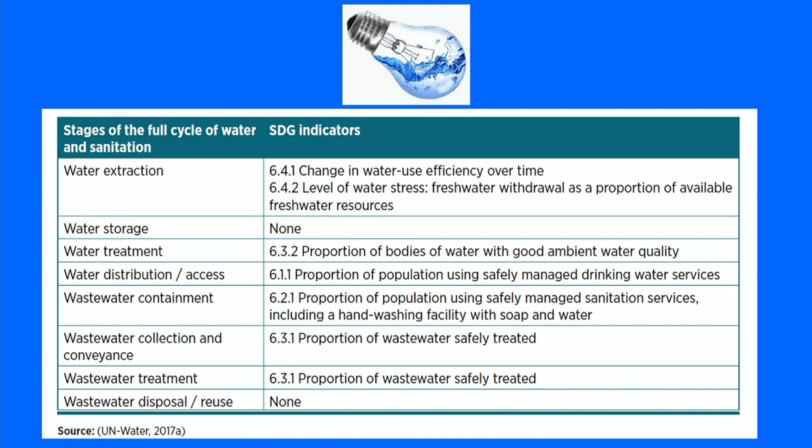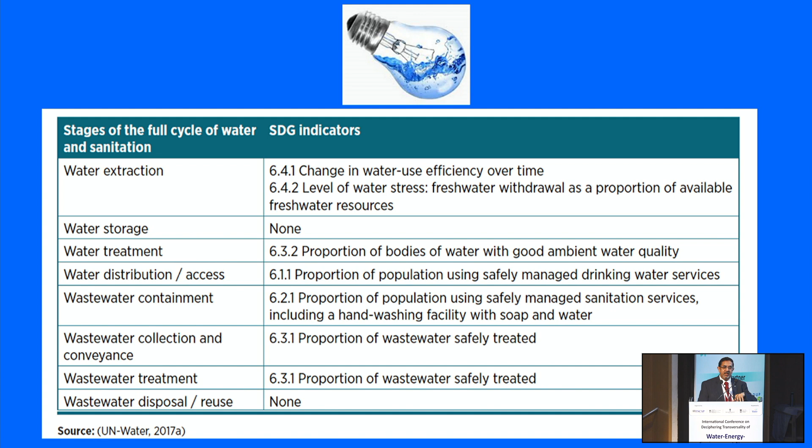If I walk you through, this is from the UN's SDG 6 standard. I don't want to go into much detail, you can get it, but what I'd like to focus on is the top of the slide up there. I like that particular structure. There's a bulb, that's electricity, and there's water in there going together. So if you really look at it, from water extraction all the way to wastewater disposal, there is enough energy involved that is either created or completely used based on where you are in the system process. If any particular city is looking at how to move in the direction of net zero or carbon neutrality or anything else in that fashion, you can move from left to right.

Water supply, supply hydraulics, sewerage, drainage, point and diffuse pollution, diverse fit-for-purpose sources, and then lastly, adaptive multiple functionalities. And you can literally get, wherever you're moving, an advantage of moving from water neutrality to energy neutrality and so forth.

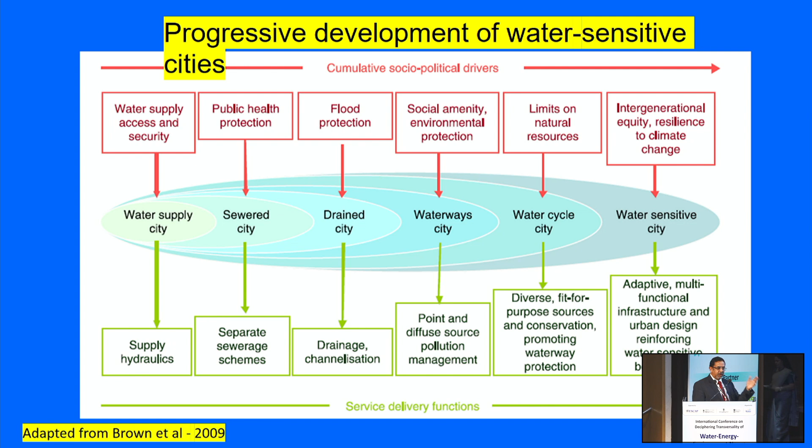Over time, it appears to people that, no, I need the water and I need the energy also. How does it matter if I have an expense of energy to get water, because water is a premise that without it I can't live, but without electricity I can live a little bit longer. But if we combine both of them together, then the advantages are much better, because once you get the water, then that water goes as wastewater.

We have not been looking very seriously at how to develop the water nature so that wastewater actually becomes a resource for us. And that resource can drive you back and forth in a circular way to get the advantage. This is 2017 IEA data, which shows the total terawatt hours, and on the right side are the percentages, the share of global electricity.

In the earlier session, a lot of people have talked about the water-energy combination, including hydro energy and usage of energy. And I think Dr. Narula has also talked about various levels of availability of energy and use, or consumption, of energy. So if you look at it, transfer, that is pumping, whether it's groundwater or coming from a long distance.

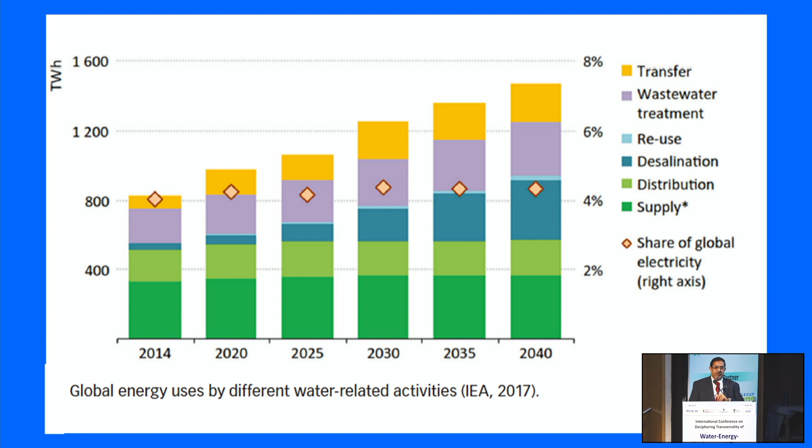In India particularly, over the last several years, we've been looking at whether I can get the water from 20 kilometers, 100 kilometers, 200 kilometers, rather than focusing on whether I can use the wastewater generated in the city to develop various water qualities for fit-for-use purposes and so forth.

So if you look at water as one concept, maybe it's rainwater, groundwater, surface water, or wastewater. There are many areas you can look at, but if you consider it as a one water concept, then that concept can take you deeper into energy conservation and possibilities of using energy in various aspects.

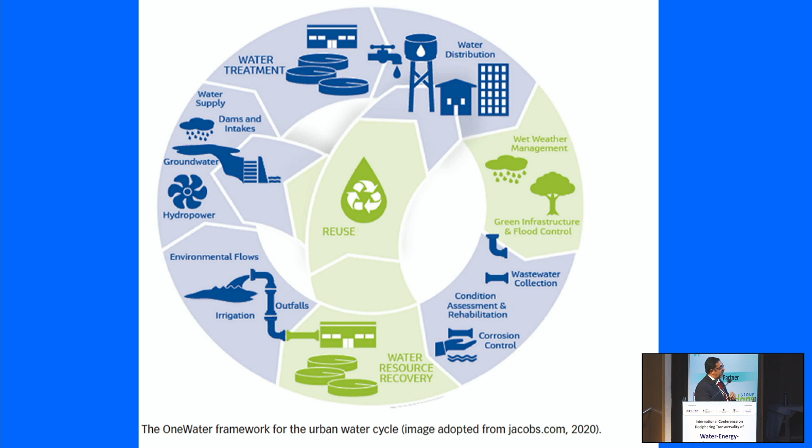So reuse then becomes a primary driver in analyzing how to get maximum benefit of the system. You can start from the left side: water supply, dams, intake, hydropower, environmental flows, that is E-flows, irrigation, outfall, resource recovery, and so forth. And essentially each single item is also heavy energy consumption. If that can be optimized and mitigated, then you can get much better benefits.

Coming from a background in wastewater and processes, if you look at GHG emissions and other emissions coming from the wastewater side, water really doesn't give you GHG emissions, but it uses electricity generated either from fossil fuels or from natural sources like solar, but the percentage of that use is much lesser.

But on the wastewater side, it consumes a higher amount of energy as we move from just discharge of BOD, that is biochemical oxygen demand, and suspended solids, to the removal of nitrogen and phosphorus. As you move to lower and lower values of nitrogen and phosphorus in the discharge standards, you get more and more energy requirement.

For example, when you do a normal BOD discharge of say 30 milligrams per liter from a 210 or 180 milligram per liter influent, your consumption is hardly 1.2, 1.3 kg of oxygen per kg of BOD removed. For nitrogen, to convert to nitrate and denitrify, you need almost 4.5 kg of oxygen per kg of nitrogen oxidized.

If you consider that transformation, then obviously you can see the amount of energy being used in the process. On the screen, going from left to right, you have raw sewage, so there is pumping, which uses energy right there.

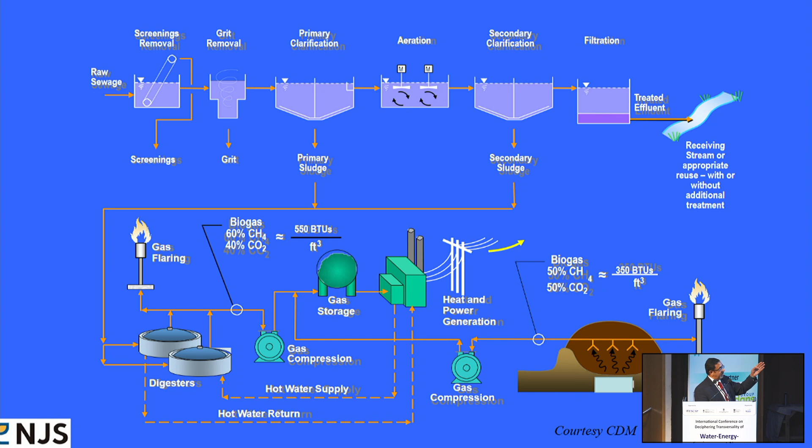We were doing fairly well up to that point. Once we start looking at what else we can do with that, the last column of the water is basically recycle, reuse, or fit-for-purpose recycle and reuse. Then you can use it for a variety of applications, from agriculture to indirect potable reuse to potable reuse. And the sludge or biosolids that come out can give you a lot of input into your nutrient recovery, your nitrogen recovery, and your CNG.

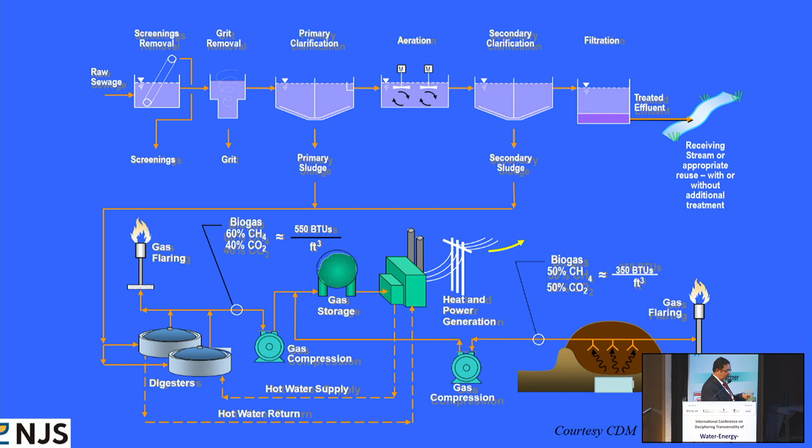In the old times, we were doing flaring, burning it out, so that CNG can also increase there. But methane has a high warming rate compared to CO2, and nitrous oxide has an even higher rate, almost 200 times more than CO2 in the atmosphere, so to control GHG emissions it's better to utilize them in the process for recycle and reuse.

Overall, if we mandate these 9 steps in the process: energy efficiency, carbon footprint, cost efficiency, plant capacity, resource efficiency, hazardous substances, for example pharmaceuticals and polyhydrocarbons. And the last one is a little bit tricky, that's PFAS. We don't have a regulation yet in India on PFAS, but there is regulation now in the West, especially in the UK and US. If that comes to us, our water will require more energy to remove PFAS from drinking water, and the standards set will also affect energy consumption. Health, water reuse, and regulatory compliance are the main key 9 points you need to drive in the process.

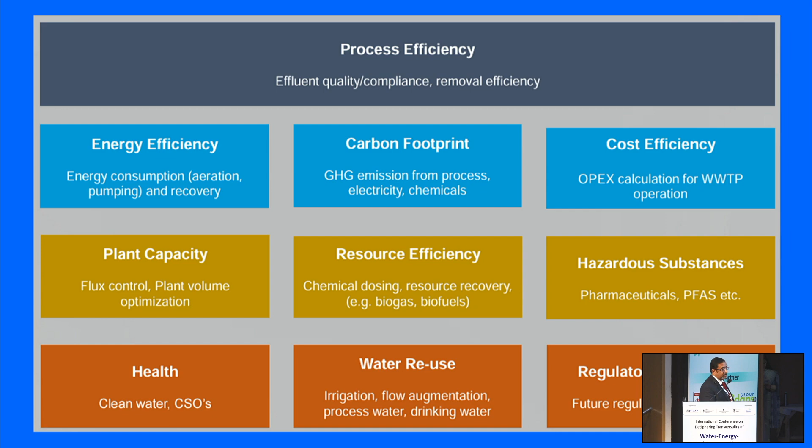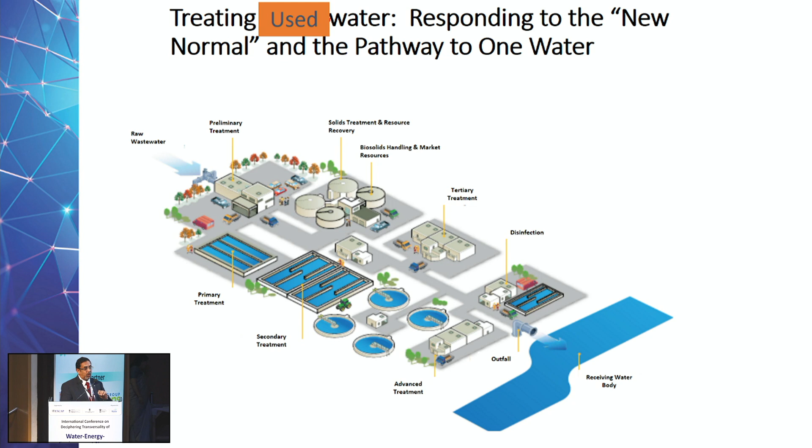To me, if we start looking at the one water concept in the mindset, then we can start considering water as a factory, wastewater as a water generation factory, not necessarily something to discharge into rivers or processes. So instead of saying treated wastewater, I would like to say treated used water, because public awareness and mindset is most important.

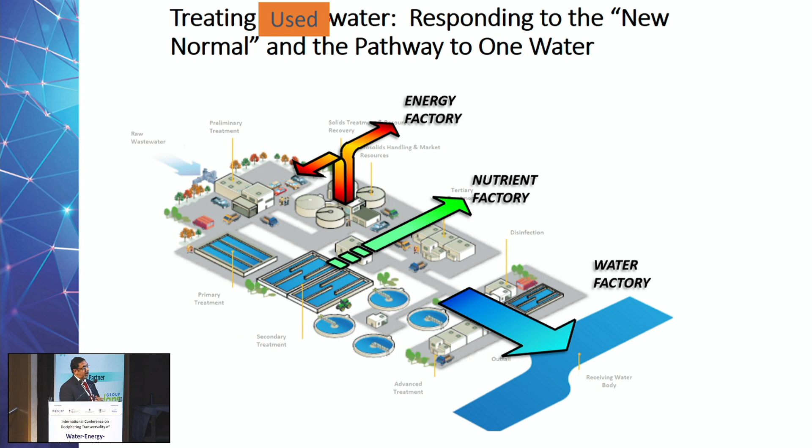I'll give you a classical example. When direct potable reuse was initially started in the West, it was an election year, and somebody said, I don't want toilet to tap. The whole project just went straight down the drain. That said, if you are really desperate about water, you can go to Namibia, to the Windhoek wastewater plant, which has been operating for the last 50 years. It literally takes wastewater from households, treats it to drinking level, and sends it back to the houses. So you need to look at that scenario wherever you can.

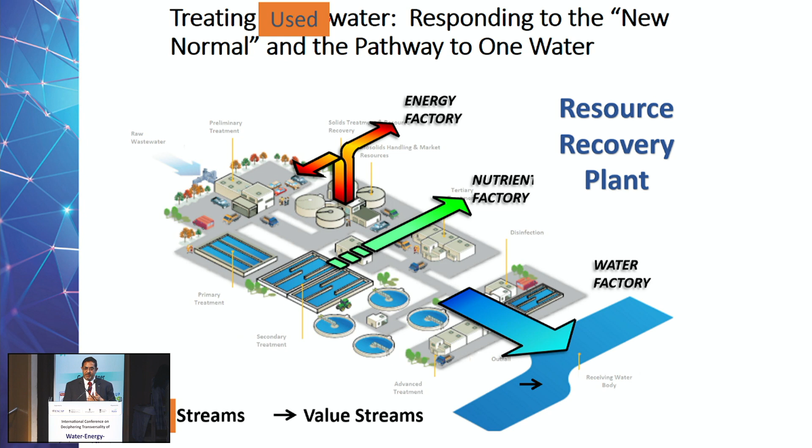So I should see used streams giving me a value stream, generating revenue, a nutrient factory, and energy. Another example: we've been working with NMCG, the National Mission for Clean Ganga, as well as NRCD, the Japanese Bank and the World Bank, to showcase how wastewater biosolids can be used for a variety of applications. A lot of areas in India, particularly in agriculture, are deprived of carbon. That carbon, if treated properly with zero or very little bacterial contamination, can be utilized very effectively as a soil stabilizer.

Here are a few examples of what we have done recently. If you see on the left side, if you optimize the treatment process, you can use a lesser amount of energy.

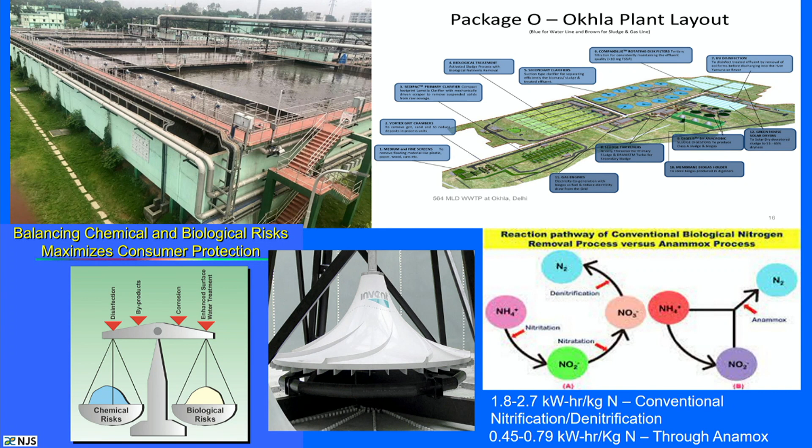In the middle one, this is a typical mixer, which is called the Invent mixer, made in Germany. The mixer uses very low power and swings around slowly so that you don't get a harsh mixing, but a very gentle mixing. So that's the way you need to look at it: lower energy consuming, higher potential equipment, and so forth.

And lastly, what is being done in the last 5 to 6 years, because everybody is moving into nitrogen removal, is a process to take the nitrogen out of your system. If you go from the left, ammonia to nitrite, to nitrate, and to nitrogen out, it typically takes about 1.8 to 2.7 kWh per kilogram of nitrogen converted through nitrification and denitrification. But there is a process that has been created and used, going from ammonia directly to nitrite and straight to nitrogen. That saves a significant amount of energy. Why has this happened? Because of analysis of processes and optimization of the systems.

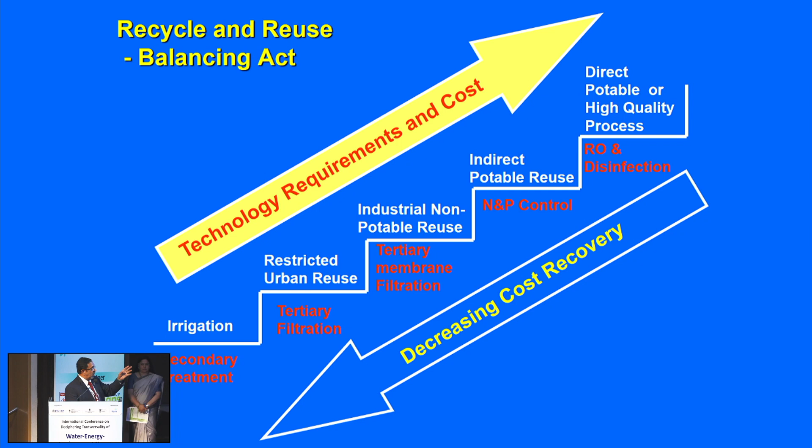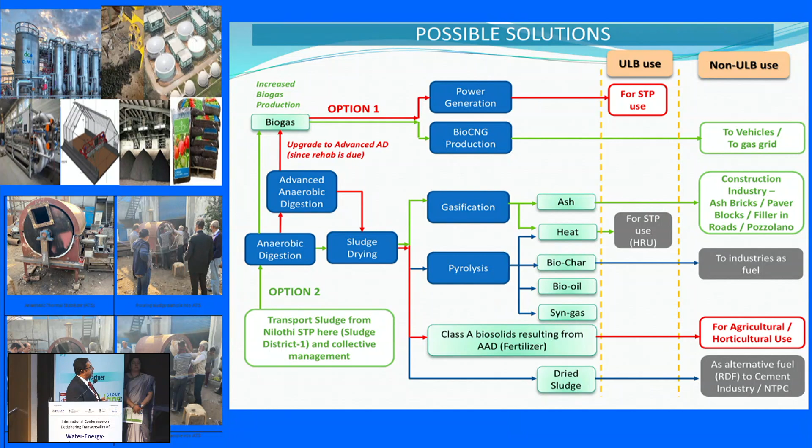We can get vehicles for CNG, we can get industry fuel, we can get agriculture use, we can get industry, or we can use torrefaction, and we've given a number of tons of this sludge to NTPC to see if they can save their coal, and they use this one. It really worked well, because as long as there is water, there is wastewater, there will be sludge. And if this can work out, this can also provide.

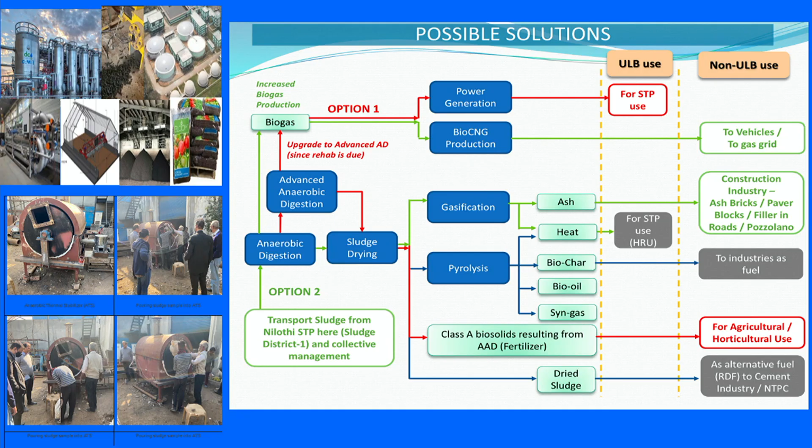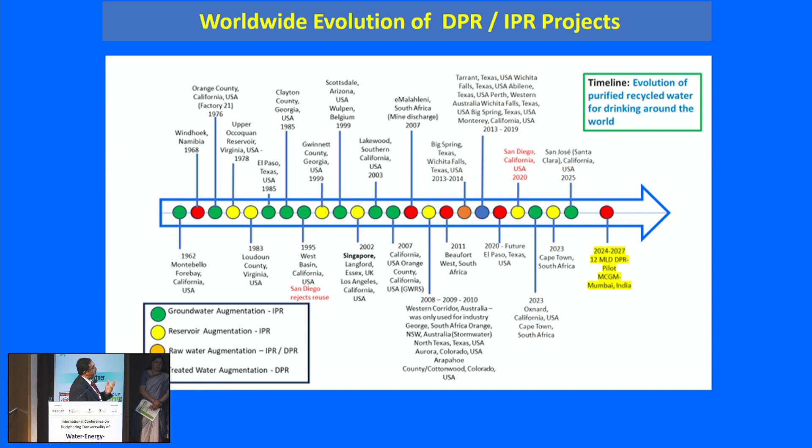This was a pilot done in the process. This is the pelletization in forming phosphorus into the process, into the system. This is the recycled reuse. This is the worldwide data showing how it has moved from different water sources to IPR to DPR. Let me go on the last slide.

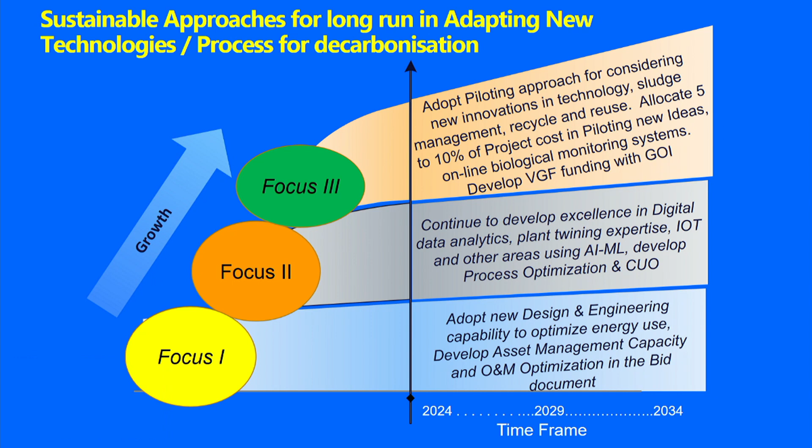This is what I would like you guys to take away: at the end of the process you need to have 3 focuses. Focus 1, 2, and 3. Focus 1 should be to adopt new design and engineering practices and optimize energy use to develop asset management capacity and O&M optimization in the bid document. So we don't have to reject if there is a new technology available, data available worldwide. It doesn't need to happen only in India, it can happen anywhere, because wastewater management treatment is the same everywhere else.

Focus 2, continue to develop excellence in digital data, because the more data you have available, the more planning you can do, and develop process optimization through AI/ML. And the last, focus 3, start putting some amount in your piloting. If you do piloting very well, you can get optimization data, you can do a lot of recycle reuse, you can allocate your percentage of cost into the process, and then you can move to a higher level for energy conservation, and we can have lesser and lesser amount of energy, or generated energy through your wastewater plants.

Thank you, Chair, and of course, India Water Foundation, Dr. Arvind, for this opportunity. It's been almost 20, 30 years that as TERI and as a person in this field I have been learning how to look into this challenge, water and energy. There's a fair bit of experience, and we all know that for consumption of water we need energy, and both ways: generating energy, we need water, and to transport water, we need energy. Quite well known. What I'll try and do is look into some examples from agri, domestic, and industrial sectors that we have worked on over the last 3-4 decades as TERI, and share our experiences.

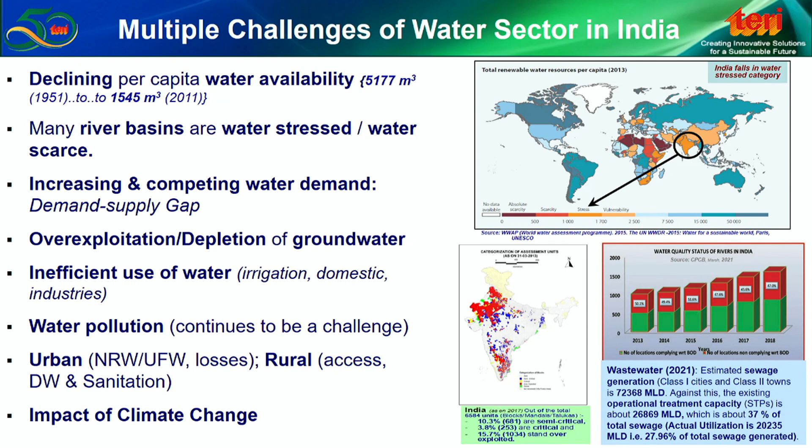Thanks to Dr. Kelkar, who gave a perspective of what can be done; he talked about wastewater, but by and large in the energy and water sector there's a lot of opportunity, and I want to share with you some of those that we have driven and facilitated. There are a lot of challenges, and I don't want to talk about them, but in terms of moving ahead, we need to look into the sustainable consumption and production of water in every sector: agriculture, domestic, and industrial.

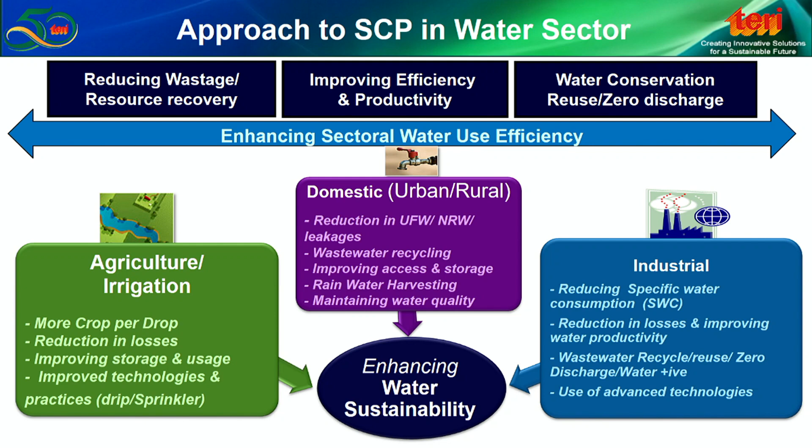Rather 2 or 3 major areas: resource recovery, reducing the wastages, improving the efficiency and productivity, and of course, conservation. And all of these are very closely linked. We have all talked about water, energy, food, ecosystem nexuses. Let's take a look at where the opportunity is and how we drive it on the ground. I'm giving you some examples which we have driven through our projects.

So let's start with the agriculture sector. There's a project in Punjab, some of you might know it, called Pani Bachao Paisa Kamao. It's the government of Punjab which is running it, and along with the World Bank and other partners, we have driven some of these interventions. This is basically direct benefit transfer of energy.

The idea was to look into what are those interventions that the farmers on ground can adopt to not only save water from the ground, because that's a challenge in Punjab, but in the process also save energy. And the idea was to incentivize the farmers by some unit amount through the saving of energy and water. But the challenge was that these stakeholders, these farmers, needed to be brought on board with those kind of interventions

which are possible. What we did was we went to the location, and amongst all those interventions, as you can see, right from micro irrigation to furrow, laser leveling, mulching, and other short duration rice varieties, for example, DSR, and so on and so forth. We demonstrated all of these on ground to the farmers in the demo farms, and a lot of outreach and capacity building activities were involved. And we measured on ground what is the kind of delta change that is going to happen with the processes. So we had this Kharif and a Rabi season and monitored.

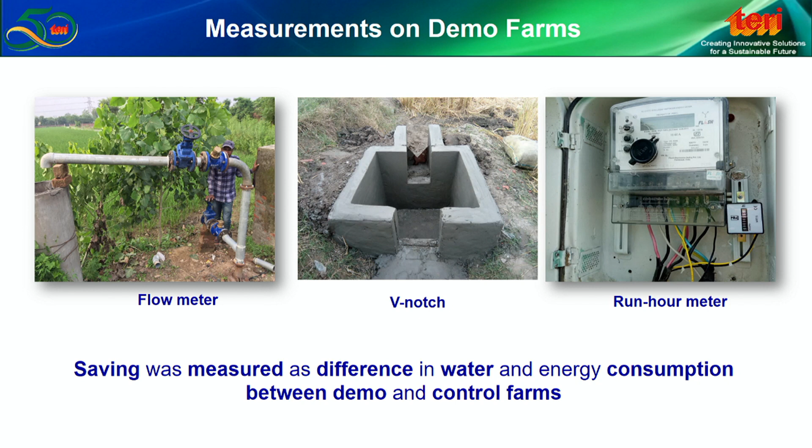So I'm giving you some examples, not all, just to give you the perspective. Now, the idea was to demonstrate to the farmers that there is an efficiency factor. If you can use, for example, drip and sprinkler system or a good resistant variety of rice, and maybe evaporative losses saving through closed conveyance and so on and so forth, there could be savings of water. And as I said, we measured. What you can see is some of those examples of the farmers who had used these interventions. And as you can see, there was a range of around, let's say, 10 to 30% of water saving in the Kharif season.

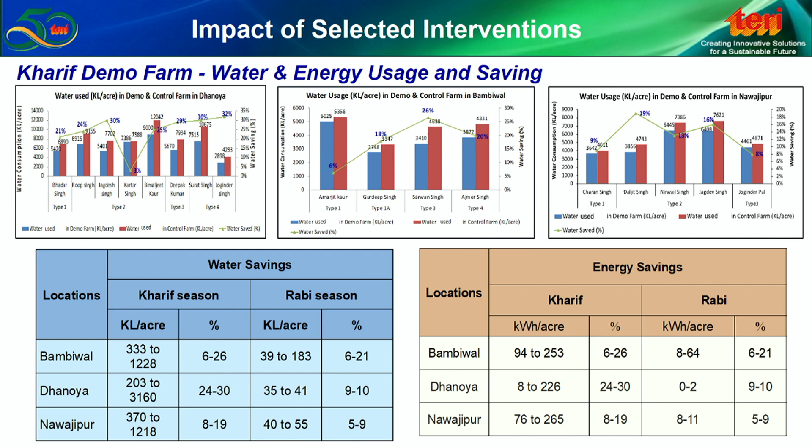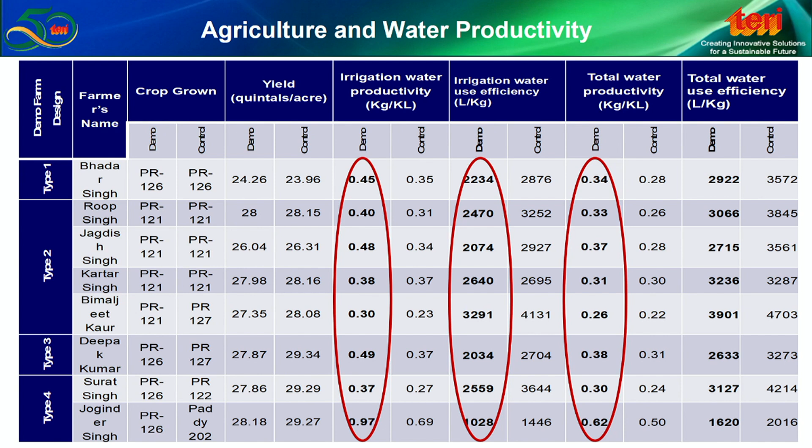Now, what I'm trying to emphasize is, we all know that this is a possibility. I think the important part is to onboard the stakeholder on ground by demonstrating and facilitating them in the process. And what this project, in a way, demonstrated was that not just the technologies and the processes, but also onboarding, comforting, winning the trust of the local community, in this case farmers, through demonstration of the kind of technology and the best practices, looking into the bottlenecks as well, and letting them prioritize what is to be taken on ground, is what the learning was actually.

Now, it's not a one-size-fits-all solution, and I'm also not suggesting that this will work across India. There are learnings in different states. But we were discussing yesterday in the India Water Impact Summit that the challenge, or maybe the solution to the water sector, is we have to customize the solution locally in each of the states, in each of the districts, as far as possible, as best as possible.

So I just wanted to give you that example. Just another example of one technology that we have come across, as part of the DST project. It's called Optiflo. Not going into detail of this, but just to share with you, in transmission of water, we have this variation of around 8 to 15% of pressure, because of which we have losses of both energy and water. What we have done, we have developed this particular valve, which makes this pressure constant and brings the variation down to less than 2%. So that difference is basically the saving of energy and water.

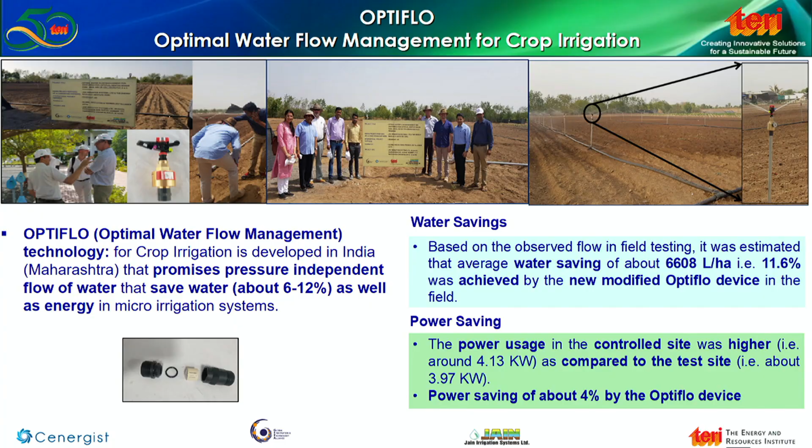We have demonstrated this on ground. It's already being commercialized now. Anywhere between 6 to 12% is of both water and energy saving in different dimensions. And you can apply this not only in the irrigation sector, but also the domestic sector.

Now I want to come to the energy sector. The largest consumption of water in the energy sector is thermal power plants, which generate energy for us. I'll give you an example. We have just completed a project on benchmarking industrial water use efficiency in India. And there's a